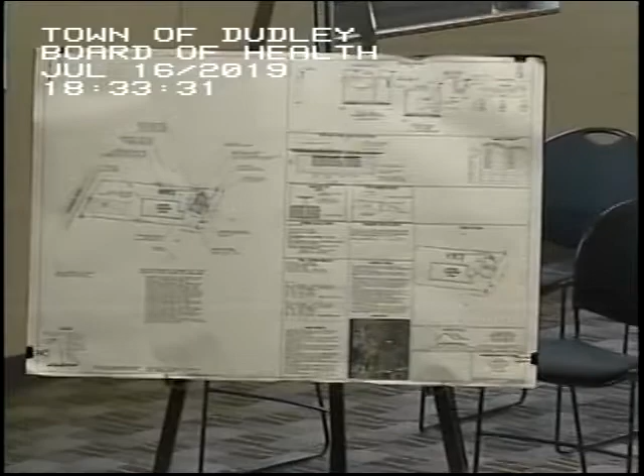Okay, so there are a number. I think Tom is familiar with those. Yeah, they're all listed here, so let me just go through. The soil absorption system does not meet the required setback from a well: 100 feet required, 65 feet provided. Second variance: does not meet the required setback from a well, 100 feet required, 85 feet provided. And that's two separate adjacent properties. Correct.

Proposed septic tanks do not meet the required setback from a well: 50 feet required, 35 feet provided. The soil absorption system does not meet the required setback from property line: 10 feet required, 5.1 feet provided. Variance: the proposed soil absorption system does not meet the required setback from a property line, 10 feet required, 5.1 feet provided. And then the proposed septic tanks do not meet the required setback from a property line, 10 feet to 6 feet. And then the soil absorption system does not meet the required setback from a foundation, 20 feet required to 6 feet provided.

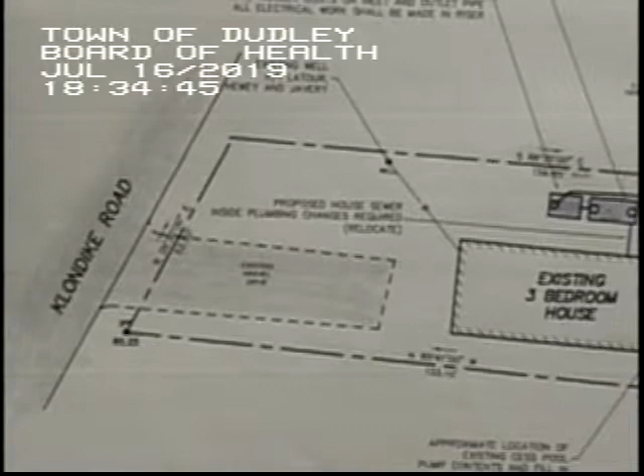And that would be their own foundation? Yes, correct. Okay, thank you. And then the proposed leach field is not fully sized: 446 square feet required, 375 square feet provided, a 16% reduction. And up to a 25% reduction is allowed. All right, so Tom.

Based on, I did get an opportunity to review the plan. This falls into more of a generalization of maximum feasible compliance. There's a certain series of evolutions we have to go through for making designs. We have to accommodate for one set of rules, and then if that doesn't work, and it's a pre-existing house, we go to the next set and the next set. This is about the third or fourth set down the line. Mark obviously designed the best that he could considering the site.

The only thing missing from the application and all the paperwork is the green cards from the certified mailings. And do we have those? Yes, I do, Tom. Beautiful, you can bring them up, that's fine. My question is, how many bedrooms? This is an existing 3-bedroom house. It'll never be more than 3.

There are some green cards that have been received, and these are the notifications we have not. But at least they all went out, so that's good. This is a 3-bedroom house, no increase in flow, just merely a simple upgrade which allows for the approval of local upgrades. Like Tom said, it's maximum feasible compliance. There aren't many options on lots like this. It's a small lot.

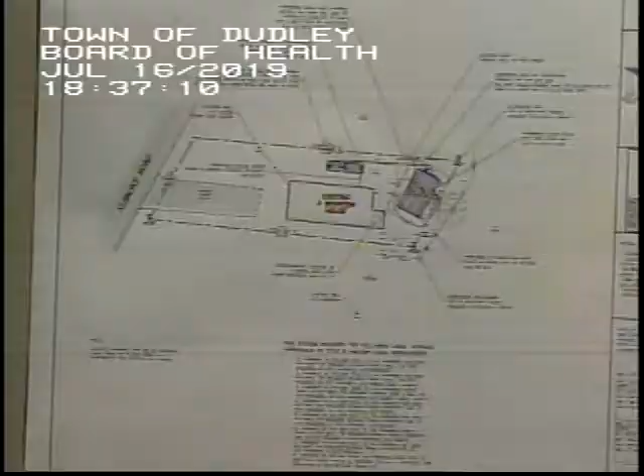But yeah, they're all small lots, there aren't many options for this. This is the backside of Calissa's farm. Yeah, exactly. Is this an upgraded system? Is this what we're doing, is upgraded? Yes. Okay, do you guys have any questions for Tom?

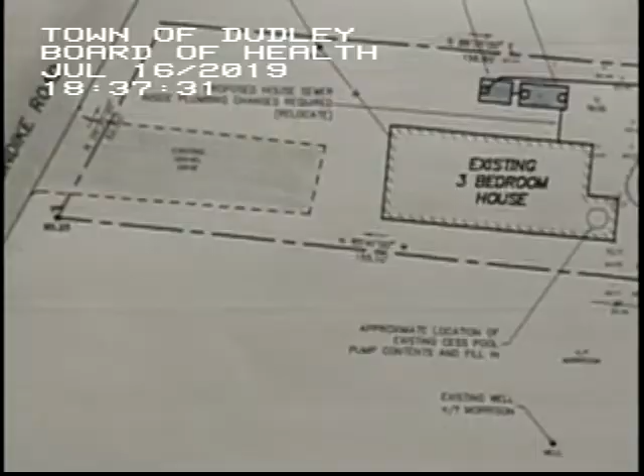So an existing septic system was in place. Has it failed or just not compliant? What they have is a septic system in failure — actually, it's not a septic system, I believe it's a cesspool. It's already on the property.

Any of these houses with cesspools, you can't modify or repair them. So they have to upgrade them to the maximum feasible compliance. This brings it from a rudimentary or primary system, where you just dump everything in the ground, to a treatment system with tanks and separation — it becomes like a secondary treatment system.

The effluent becomes clarified, more than just dumping everything into the ground. The soils here are the most desirable soils for treatment of the effluent that you could ask for — sandy material, not like a till, not compact. The effluent's going to be treated to the maximum allowable standard.

So it says 100 feet is required, but 65 feet is provided. That's the amount of room that they have? The only available space they have is 65 feet.

What I can do is try to give you an example of pre-existing laws before Title V came into play. Title V came in 1978. There were a lot of lots where septic systems were already only 50 feet from wells — that's pre-existing in a lot of places. Until '78 was when they started changing to the 100-foot requirement, and '85 was when it really became mandatory.

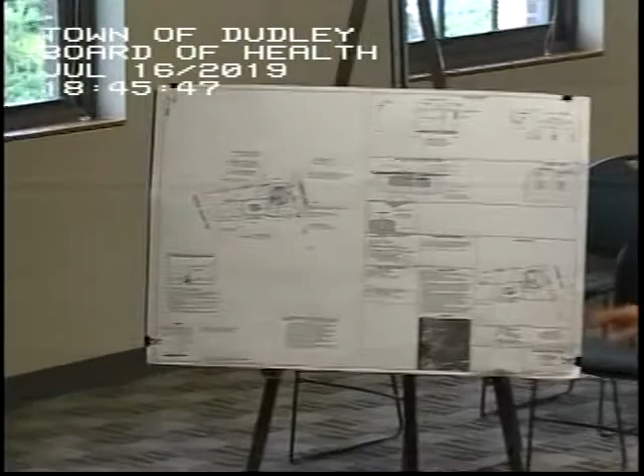As you read through those, I'm thinking this must sound like a lot of local upgrades we're asking for. But especially on these types of lots, and more especially on this one which is on the water, there's a balance we're trying to maintain between the location of the septic system and protection of the lake. Some people consider their backyard to be the roadside when they live on a lake, so it's on the roadside. If we proposed something on the lakeside, it would never get through conservation. There's a very limited area adjacent to the road to place this system, and this lot is even more constrained than the previous lot.

And what size house is this? This is also a three-bedroom.

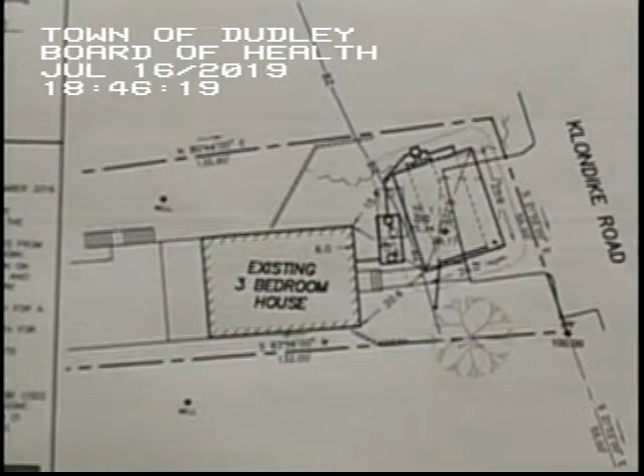It's the existing house. How far is the setback from the road? Is this the one, I can't see. Is this the septic? That's the leach field, the proposed leach field, 10 feet from the road. Oh, yeah, there it is, sorry. There's call-outs for each one of the things.

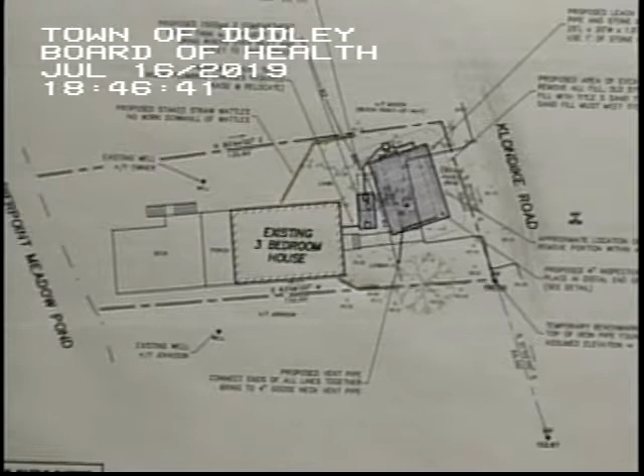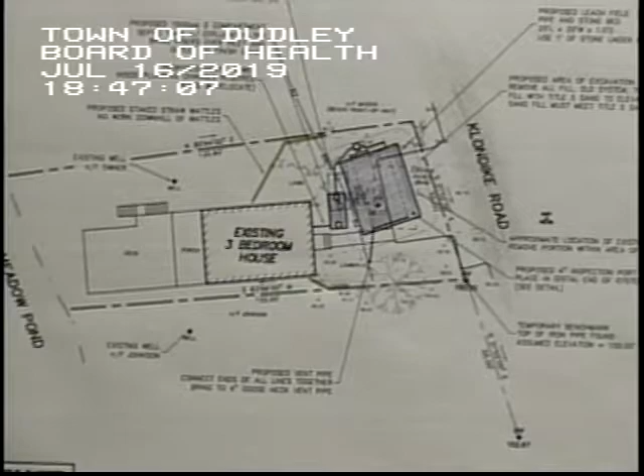You're providing better than what was there. Exactly, and that's the focus we try to maintain, that it's an overall improvement. This house had a catastrophic event back 10 or 15 years ago, and they did an emergency repair on the septic system because the fire truck dropped through the existing system that was there. There was a jury-rigged thing that was done. I remember it was the fire that was there. I walked up to the site and I said, oh, I remember this place.

Do either one of you have any questions for Tom? No? It's the same as before, right? 100, but it says 53. Still all compliant because that's all the space that was available. Sometimes you have to pick a compromise. It all depends. We try to insult as few people as possible.

Try to insult yourself even more. You insult yourself before you insult somebody else. I'm just curious, what's the lot?

Is it level? Is it slanted? No, no, it's a big walkout at the back. Are they gonna be pumping it up? No, this is a gravity feed system. They got the foundation up high enough. So it's the other way? And then there's a walkout in the back that goes out to the right, to the lake. Walk out on the backside.

Any other discussion regarding this? If not, I'll close the public hearing. Public hearing closed at 6:47 PM.

So then I will entertain a motion for 82 Klondike Road, the septic plan application for local upgrade approval, items 1 through 5. I make a motion to accept the public hearing septic plan application for local upgrade approval for 82 Klondike Road, items 1 through 5. I second that. I have a motion and a second. Any other discussion? Seeing none, all in favor? Aye. Passes unanimously. Thank you very much.